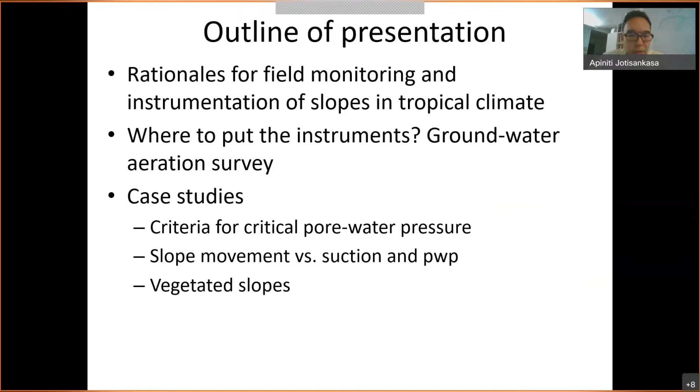First, I will speak about the rationales for field monitoring or instrumentation of slopes in tropical climate like Thailand, and I will try to answer questions like where to put the instruments. We will talk about the new technology called groundwater aeration surveys, and then I will present various case studies in Thailand, like the criteria for critical water pressure or suction, and the relation between slope movement and suction, as well as vegetated slopes. And with that, I will conclude.

So first, the problem statement. Slope erosion, soil erosion, or slope failure like this happens so frequently in highway, rural road networks in Thailand, and these are mostly related to heavy rainfall, becoming more and more frequent. This is possibly due to extreme climate leading to severe drought alternated with heavy rainfall, forest fire, and so on. There are also needs for agricultural land in highlands and mountainous areas, as well as encroachment of poor communities in many landslide risk zones. So many farmers practice slash and burn that lead to air pollution, erosion, and landslide risk. This indirectly affects landslides on the highways and roads going through this mountainous area.

So in Thailand, I think like in many places in Asia, we suffer from shallow slides or debris flow in hilly terrains like this. These shallow slides can be widespread and lead to debris flow in a large area, causing a lot of destruction. But this kind of shallow slide can be prevented successfully using vegetation and bioengineering, because in many cases a hard engineering structure approach can be too costly. There is also a need for providing an early warning system for such rainfall-induced landslides, and one requirement is a low-cost monitoring system so that we can install as many of these devices as possible in the field.

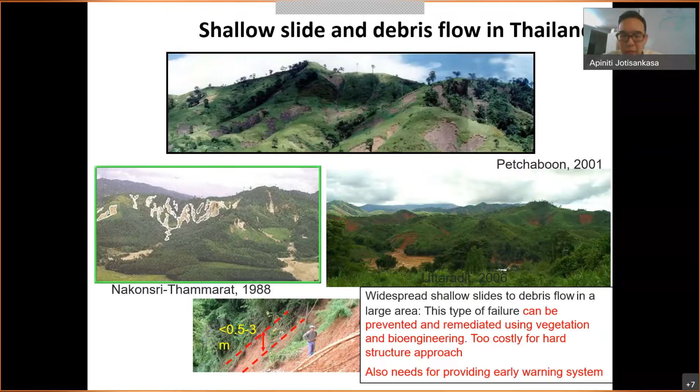One of the simplified mechanisms we commonly assume is that when the rain falls, it leads to infiltration and wetting front movement, or a rise in the perched groundwater table. With the reduction of soil suction or increase in pore pressure, this leads to a decrease in effective stress and subsequently a decrease in shear strength and slope stability. Because soils in tropical areas are normally unsaturated, understanding infiltration is very crucial, in terms of the soil water characteristic curve, permeability function, and so on.

However, in the field, seepage in slopes can be quite sophisticated. For example, we not only have rainfall infiltration, but also exfiltration of groundwater from rock layers to the topsoil, and this inclined seepage in rock layers can happen along discontinuities. On top of that, runoff and severe erosion can continuously change the slope geometry, especially at the toe. And after a long drought season, we can have desiccation and cracks that lead to preferential flow paths. So in short, for seepage in tropical slopes, the wetting fronts don't normally come uniformly but rather in terms of finger flows, for example.

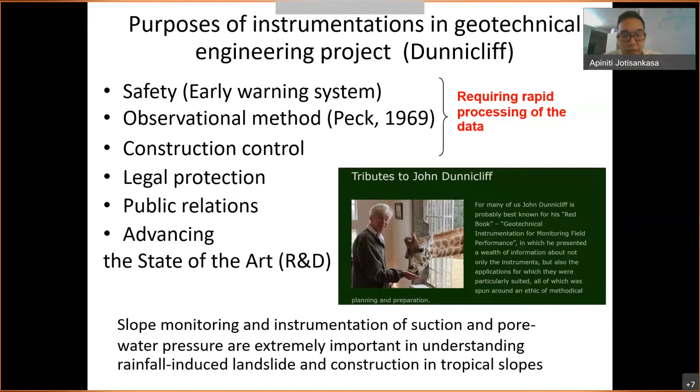I would like to introduce some of the recent advancements in the slope monitoring system that we developed at Kasetsart University. Right now we have developed what we call the GIL platform. GIL stands for Geotechnical Innovation Laboratory of Kasetsart University.

With the various kinds of slope monitoring devices that I will introduce in a bit, we transmit the data through what's called NB-IoT in Thailand. It's one of the popular low power wide area networks in Thailand. Maybe you can find your own similar network in your country.

With that, we send data to the cloud server and can do online analysis or processing of the data and provide warning criteria. This platform can be accessed using a web application or mobile application on your phone. If you calculate, for example, the factor of safety or the warning criteria based on the inclination or tilting of the slopes, it gives you a notification if any likelihood of failure is going to happen.

Now I would like to talk about the location, the effective location of the instrumentation. When we decide to do this instrumentation in the slope, we have to decide about the location of the instrument. However, in reality, the seepage can be very irregular, unlike what you get from numerical analysis.

The flow can be like finger flows, pipe-like flows, or fracture flow. So it can be very difficult to find the exact location of this critical seepage zone. However, the success of the drainage technique for stabilization or landslide warning systems pretty much depends on the location of this instrument. Of course, you can use commonly used geophysical methods like resistivity that are commonly employed in geotechnical engineering, but it still needs some expertise and processing time.

So if you just want to go onsite and then be able to locate the area where there is seepage, we adopted the technology developed by Dr...

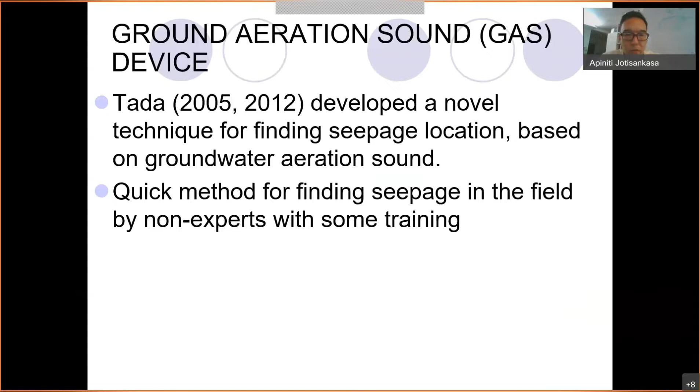Tada in Japan in 2005 developed a novel technique for finding the seepage location based on what they call the groundwater aeration sound. This is a quick and convenient method to find seepage in the field. It can even be used by non-experts with some training, and is quite suitable for practical work that requires immediate information on seepage location.

For example, if you want to determine where to put the piezometer or the horizontal drain, you should know exactly where the groundwater comes from in that part of the slope.

So this is how the device looks. The device uses an ultra-sensitive sensor, just like an accelerometer or a microphone, for picking up the groundwater aeration sounds. With large amplification, we could hear that sound and see the amplitude or loudness of the sound in numeric terms.

These sounds actually come as a result of water seeping through the soils. Once water seeps through the soils, air will be pushed out, resulting in what they call the bursting of the water menisci, and this air bubble will burst.

This sound level in terms of acceleration will be calculated and processed, shown by the device as just an index unit called the d value.

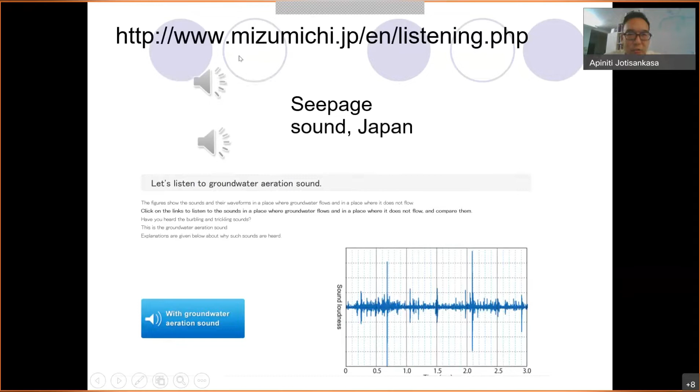Unfortunately, due to technical reasons, I was trying to play this sound but it doesn't work. But I'll give you a link here where you can log onto this website, press this button, and hear the sound for yourself later on.

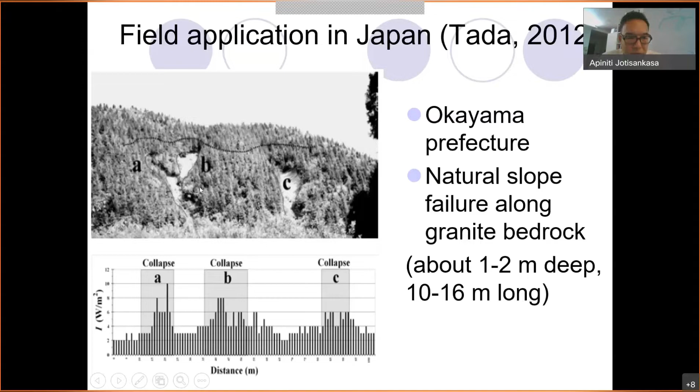For example, on a hill slope like this, where there was a landslide happening, right after the landslide there could be a scar like this. But after many years, vegetation comes up and you cannot see the scar anymore. So these studies just walk on top of the hill like this and listen to the sounds, and they could hear a very loud sound just on top of the scars.

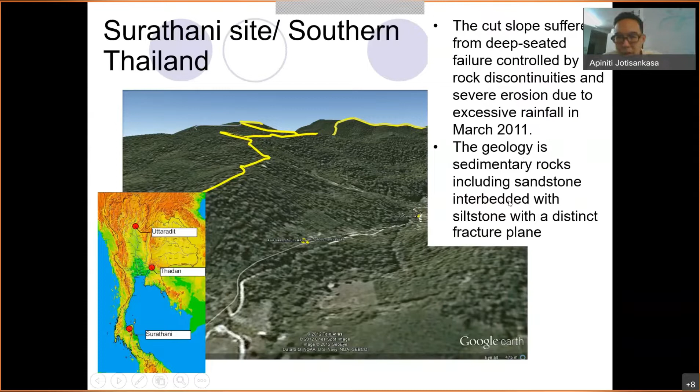Another site we experienced is on the cut slopes in Surat Thani, in the southern part of Thailand. This is a cut slope that suffered from deep-seated slope failure, controlled by some kind of rock discontinuity, and also suffering from severe erosion. The geology of this site is sedimentary rocks, including sandstone interbedded with siltstone, with some distinct fracture plane.

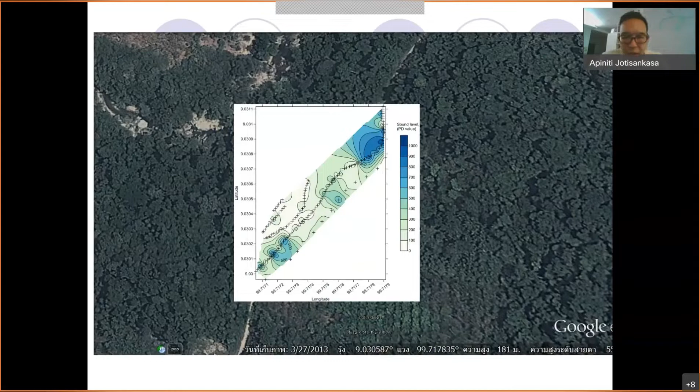We could actually see that the location of the gully coincides with the location where we could hear a lot of seepage sounds. So in practice, even without this device, it's quite intuitive to think that along the gully there will be a lot of seepage anyhow.

We also combined this with geophysics tests, and the result from the GAS survey was in good agreement with the geophysics studies.

This is quite counterintuitive when you think that at the toe or lower part of the slope, you would expect to hear a louder sound of seepage, or more critical seepage sounds.

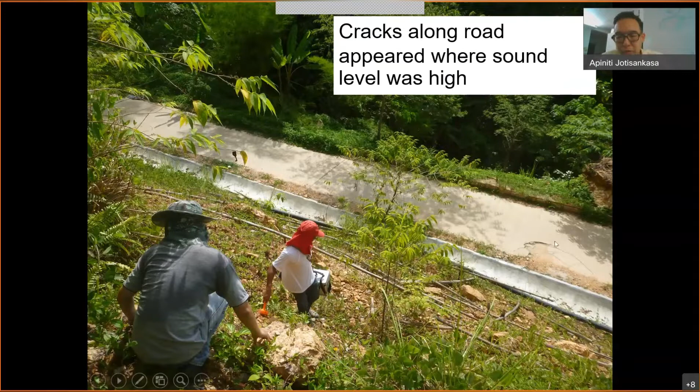One useful tip from our study is that we found the cracks along the road actually coincide with areas where the sound level is quite high. So if you want to quickly locate the area of high seepage, that's the location where the damage to the road appears, just like this.

The orientation of the cracks along the roads is actually aligned with the orientation of the rock fracture planes and with the high sound level of the seepage. For example, along this crack here, you could hear a very loud sound of the seepage.

Another attempt we tried is to correlate this water pressure with the groundwater aeration sounds. So I would like to explain this case study, where we put water pressure and suction monitoring devices on the vegetated soil fill in Nakhon Nayok.

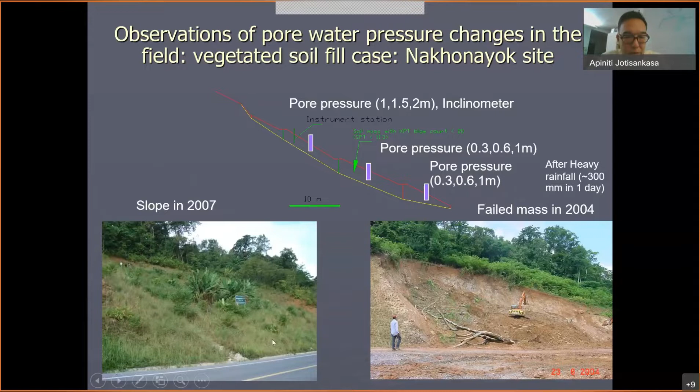And then we could actually observe the movement. This is a typical result of the water pressure and suction measurements in Thailand.

During the rainy season, the suction can be on the order of 0 to minus 25 kilopascal of pore pressure, and only during heavy rainfall intensity. These bar charts represent rain intensity; at this point it's more than 100 millimeters per day, and we start to see positive pore pressure, just like this.

So suction is important, of course, but at the critical time when the slope starts to move, it only moves when you have positive pore pressure.

During the dry season, the water pressure decreases, suggesting suction builds up, and it keeps decreasing until about 100 kilopascal, at which point the low capacity tensiometer we use doesn't function anymore. This means the tensiometer needs frequent maintenance to function properly.

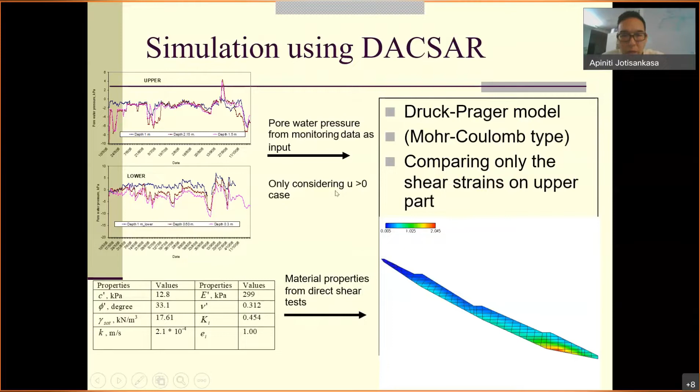We tried to back-analyze or simulate this using the finite element program called DACSAR, developed by Tokyo Institute of Technology in Japan. We used a simple Drucker-Prager model and compared the shear strain, which gave quite a good comparison.

The simulation underpredicts the shear strain, but if we change the modulus value of the soil, we can get a better improvement.

The key point here is to show that the movement of the slope starts to happen when you have positive water pressure. With the simulation, we could use the shear strain at the failure point as the threshold we develop for the inclinometer reading.

So we could have a threshold value for a warning system, based on rainfall intensity, past landslide events, or simulation using finite element software for seepage. We can get the water pressure, expressed in terms of RU or coefficient of pore pressure, and shear strain, and develop some kind of alert, alarm, and action based on this threshold.

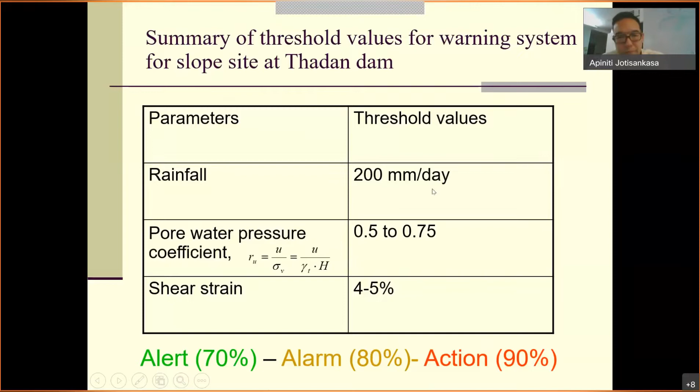Now I would like to talk a little bit about groundwater aeration again. Earlier we discussed this PD value, which represents the loudness of the ground aeration sound. We tried to correlate this PD value with the water pressure.

We could hear the groundwater aeration sound, or the PD value, when there's some suction, because the seepage can happen in the unsaturated zone, with air bubbles bursting and so on.

However, we find that this gas technique, or groundwater aeration, depends on the timing of the survey. When we go back to the site at different times, we get different correlations, due to differences in background noise and timing. However, in relative terms, we could find that, for example, this area is a more critical zone than other zones.

So we have a different set of correlations between the values and the average water pressure in the slopes. This observation is, of course, site specific and should be used with caution, but it gives us some idea that if you only have this groundwater aeration device, you can go to the site, put it on the soil surface, and guess how much seepage there would be on the slopes. So we did a SWOT analysis for this gas survey.

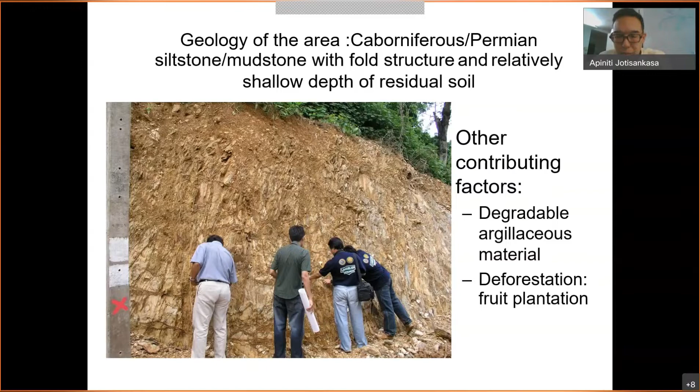The major mode of failure is shallow slip, like in the photo. The geology is Carboniferous Permian siltstone and mudstone with fold structure, and the depth of residual soil is relatively shallow. Other contributing factors include the degradation of what we call argillaceous material, and some deforestation as well.

So clearly, if the rain keeps supplying water to the slope, infiltrating the slope, we would have a perched water table at the bedrock.

And then during the dry season, we have no rain at all, and the water pressure reduces down to the point where the tensiometer starts to cavitate, at minus 80 kPa. So again, we need frequent maintenance of the tensiometers.

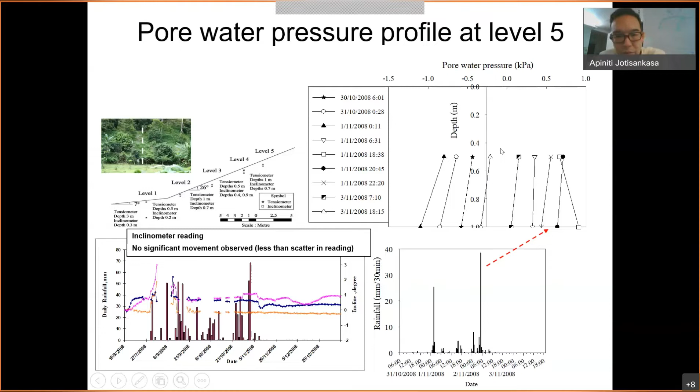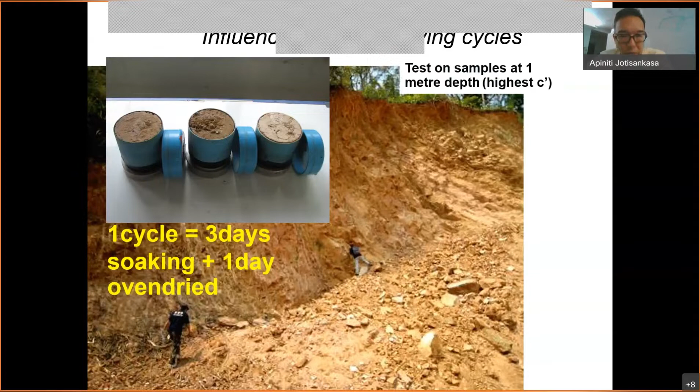So we look at the effect of drying and wetting. We simulate this in the lab, like 3 days of soaking of the sample plus 1 day of oven dry. We call this 1 cycle. So we put the sample through 5 cycles of wet and dry. We could see that the cohesion value of the soil actually decreases with the cycle time of wet and dry. But this is a small direct shear test, so we could have some cohesion intercept here. We could say that the C-dash or effective cohesion reduced by 50 to 60%, while the angle of shearing resistance phi-dash is relatively unchanged.

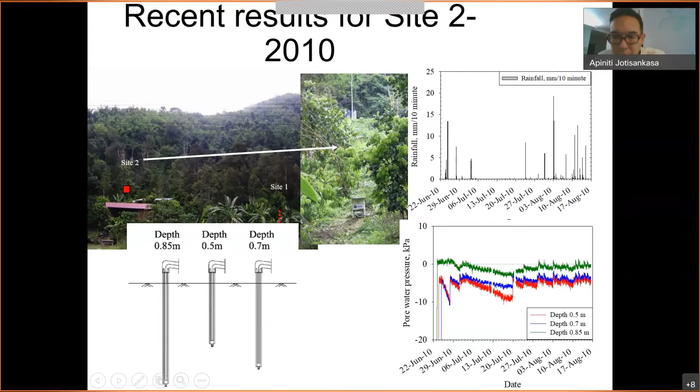Some recent event, not so recent, it's 2010 I think, we had a flash flood event here. This is the reading during normal time, so we have negative pore pressure like this, minus 10 to 0. And during the flash flood, we were lucky to be able to monitor the slopes on the side during this flash flood event. So we could obtain somewhat the soil moisture or water pressure profile on the slope during the flash flood. But it's only the flash flood, no slope failure.

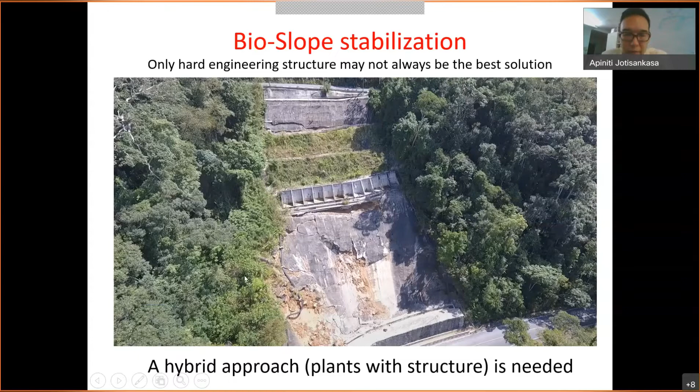So we like to use what we call soil bioengineering, which is defined by Sotir in 2002 as a sound engineering practice that integrates ecological principles to assess, design, construct, and maintain living vegetation systems, to repair and protect, and enhance healthy function of the slope. So in Thailand, we use things like vetiver grass or soil bags with live stakes and so on.

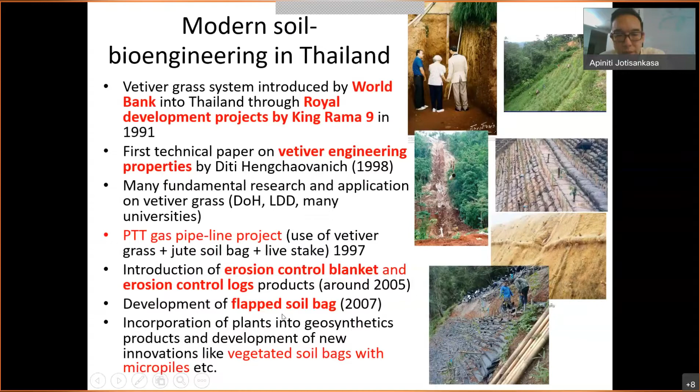So this tells you the timeline of bioengineering in Thailand. We use vetiver grass quite frequently and widely, but we also use erosion control blankets, coir logs, flap soil bags, and so on. Recently, we use these flap soil bags with micropiles.

So the research approach is that we combine field observation, laboratory work, and numerical modeling. Field observation is very important, so I would like to relate this bioengineering to the field monitoring part of my talk.

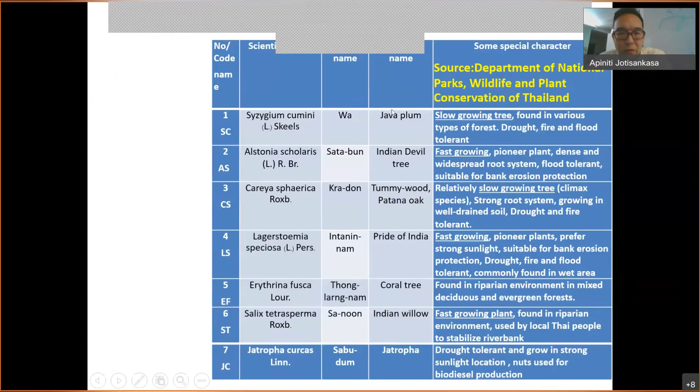Firstly, which species can we use for bioengineering? We investigate various kinds of live stakes. I won't have time to go into detail on all the species, but I want to point out that fast-growing species, or what we call pioneer plants, are very useful and effective as live stakes.

So in order to plant trees successfully, you need an irrigation or watering system. We also look at root-soil mechanics as well.

This is the biomechanics of roots with soil. When we think about the contribution of roots to the soil's shear strength, it can be in terms of root reinforcement, like the root cohesion, CR.

So we have a simplified model for root reinforcement as root cohesion. Roots can also affect the water pressure by infiltration and transpiration. Roots can affect infiltration by changing the soil water characteristic curve or permeability function of the soil, and they can affect transpiration by inducing suction in the ground, which decreases the water pressure.

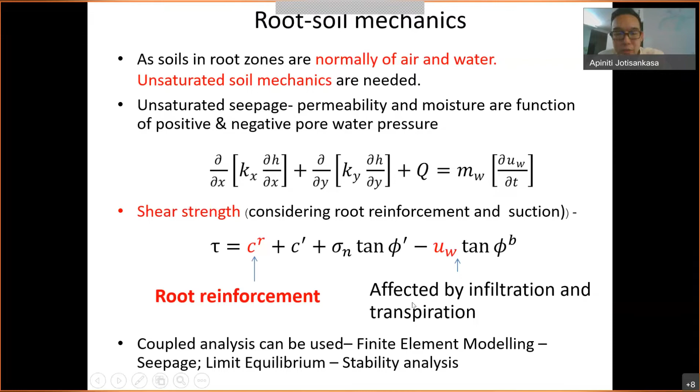When we look at a simple mechanistic model for root reinforcement, like Wu 1979, we can calculate the root cohesion based on the tensile strength of the roots and the amount of roots in the soil.

At Kasetsart, we also use the large direct shear test to test the root contribution on soil in both unsaturated and saturated conditions. We developed a model to predict root cohesion based on what we call the site root area ratio. So if you know the root area ratio at the site, we can predict the CR, or root cohesion.

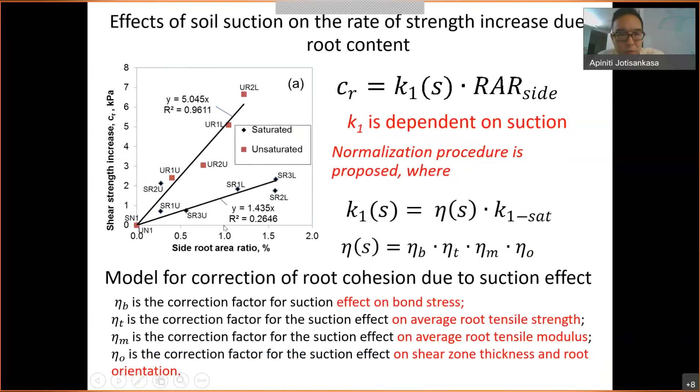We could adopt this technique in the field as well. We put what we call a mini rhizotron, which is a transparent tube, on the slopes, and then we can monitor the root area ratio in the ground. We could also monitor the suction, but it's only a point-wise measurement, at one point.

But of course, we could extrapolate this point measurement by using some image analysis of the whole slope, something like that.

In this case, we use what we call jatropha live stakes, or brush layers. The live stake is laid in an inclined direction and performed quite well, and we observe the root concentration in terms of area ratio in the ground.

With the root sketch like this, we could calculate the root area ratio, and with the relationship between root area ratio and cohesion, we could estimate the root cohesion in the field. With the root cohesion, we could estimate the factor of safety.

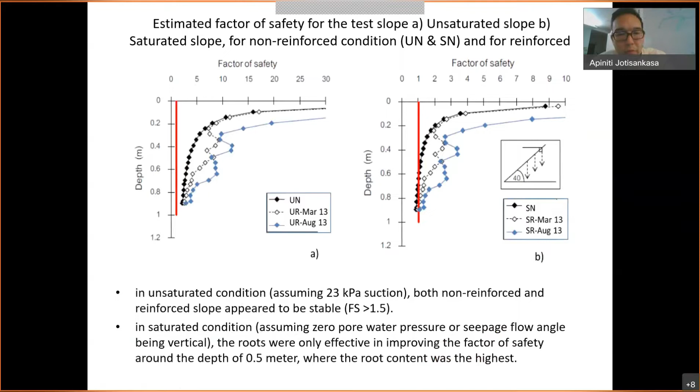But of course, the factor of safety, or the contribution of roots, depends on the suction, on the moisture condition as well. So this factor of safety related to roots is also related to the suction condition in the field. So soil suction is not only important for early warning, but it's also important for calculating the contribution of roots on slopes.

Another area where slope monitoring is quite important is when we evaluate erosion control products like slope mulching. We know the benefits of soil mulching include preventing erosion from direct raindrop impact, preventing soil surface drying, increasing soil nutrients, and so on. We have various techniques like hydroseeding, 3D netting, and erosion control products.

In Thailand, we have this test site at Doi Inthanon that suffers from shallow movement. Previously, the slope was stabilized using shotcrete, and it failed. So we use this erosion control device with horizontal drains, and we install some water pressure monitoring devices here.

Okay, this is the location, the horizontal drain. I would like to show you the soil cover system that we use for this remediation.

We have various techniques like the erosion control blanket on top of the clay sorting. So we have the fine grain on top of the coarse grain, so it could actually act as a capillary barrier on the slope as well.

Section B has soil log and clay sorting, but without the soil blanket or erosion control blanket. And in D we have soil blanket, soil log and geocell erosion control mat. We installed in total 60 KU tensiometers on this part of the slopes.

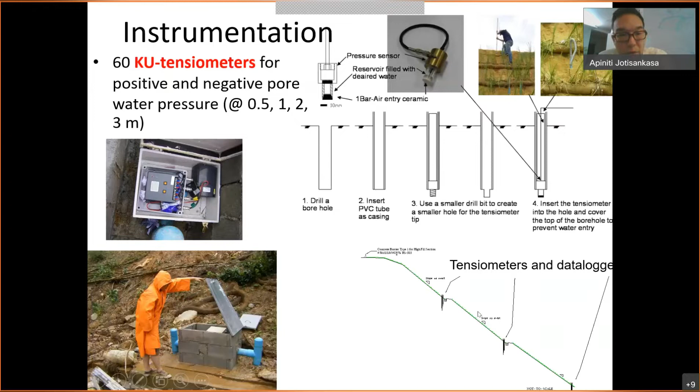The monitoring of the rainfalls shows that we have various times when the maximum daily rain is more than 100 millimeters. In Thailand, the usual threshold when we issue the warning for landslide is 100 millimeters per day, so on this day we had quite a few days when we had to issue the warning.

After this first time evaluation, we find that plot A is better than the other plots. This is just like the visual inspection.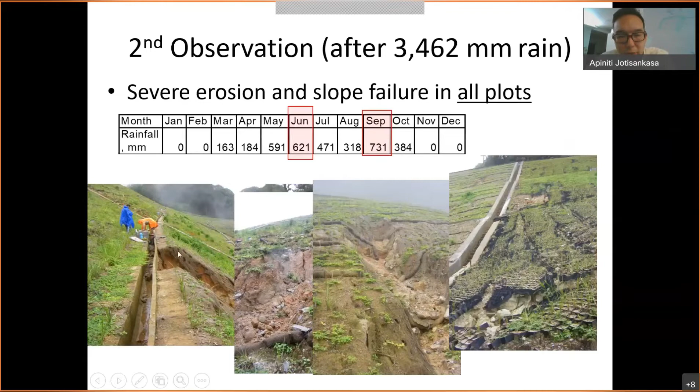However, the second observation after the torrential rain in Thailand shows that all the plots actually failed, from shallow slides and so on like this. And we monitor the pore water pressure.

We also tried to do the simulation using some two-dimensional finite element software like SEEP/W. We could get good agreement, but mainly only at the 0.5 to 2 meter depth. At the 3 meter depth, we still struggle to get good agreement with the simulation, and we think this may be due to the 2D effect as well.

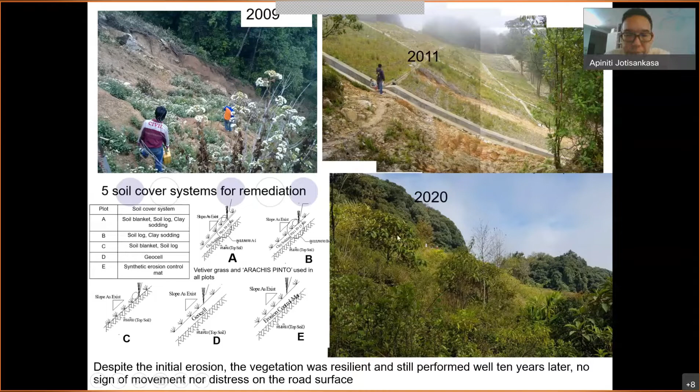This is the first time we use this technique in Thailand, so we were concerned about the performance of this particular technique here.

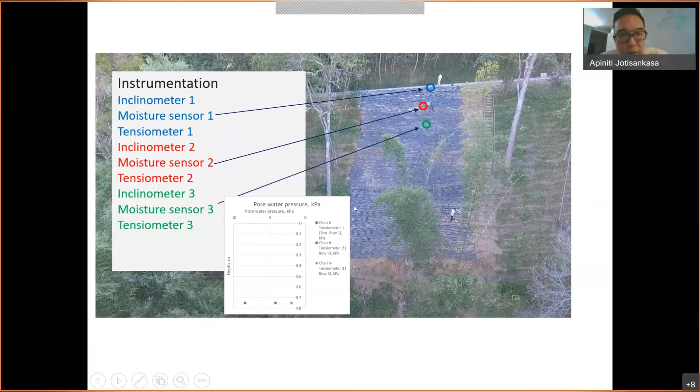Now let's see the monitoring results. The tilting degree, this is the tilting of the screw piles, is very small, even less than 0.1 degree. And the soil moisture is actually lower in the lower part.

If we look at the water pressure, we have a negative water pressure during the dry period, and during the rainy seasons it starts to go up like this, and again the water pressure is in the magnitude of about -10 to 0.

One of the points I would like to make is that with the tensiometers, it's very good to have the measurements, but in a remote area like this, it's very difficult to go back to the site and do the flushing or maintenance of all this.

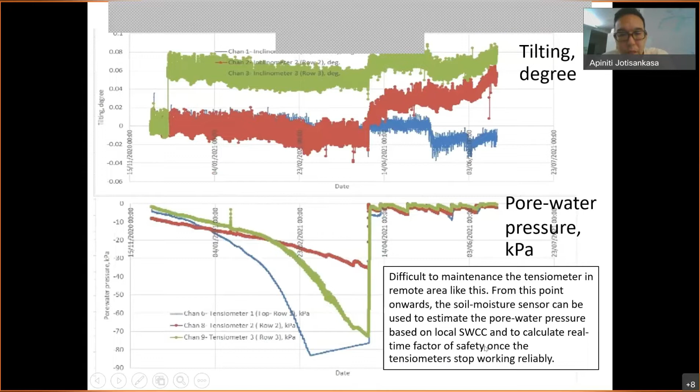Measurement to calculate a real-time factor of safety. So with this, I would like to conclude that slope failure and erosion is more severe due to climate change and increasing infrastructure in Thailand. And water seepage in slopes is so sophisticated in the vadose zone, not just because of suction and the unsaturated soil property, but due to geological heterogeneity, rock fracture, and so on.

The critical job is how to find the suitable location to install these instruments. We find that major slope movement normally takes place when water pressure is positive. But of course, monitoring of soil suction and water content is quite useful, also useful for early warning of slopes. And not just that, it's also useful for bioslope stabilization if you want to have controlled irrigation in order to make your plants survive and be able to stabilize your slopes.

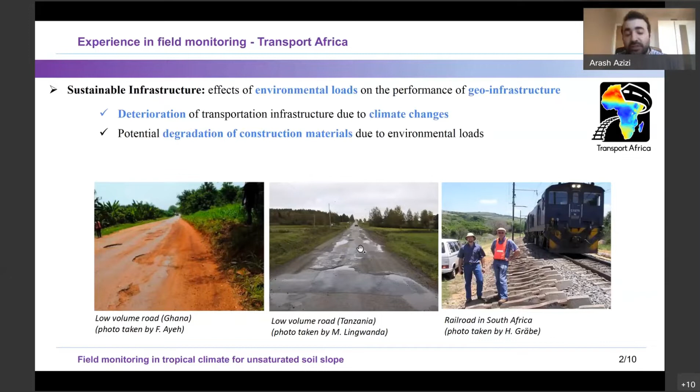The first thing is, of course, making a sensor network to measure soil-atmosphere variables. Atmosphere means climate, the meteorological variables. So we use rain gauges and temperature/relative humidity sensors to measure these variables - rain gauges for rainfall measurements. There are other meteorological sensor types for atmospheric pressure or radiation, but we used only these two sensors in our project.

But the other side is, of course, measuring soil variables. We used different types of sensors to measure soil variables. We could measure displacement, we could measure deformation with different sensors, but because the roads we were working on were basically rural roads with low traffic loads, the focus was the effect of changing hydraulic properties. So we didn't measure any deformation, we only measured the changes in water content and suction.

So I'm going to introduce briefly how these sensors work. One variable in the soil, as we've been talking about, is water content - volumetric water content, saturation degree, any sort of water-related parameter. We use a sensor called the 5TE, developed by Meter Group, which is a dielectric constant sensor. It measures the dielectric constant of the soil, which is basically the ability of the soil to store electric charge. Fortunately, there is a good relationship between this dielectric constant and volumetric water content, so it can measure volumetric water content indirectly and quickly measure the variations of volumetric water content.

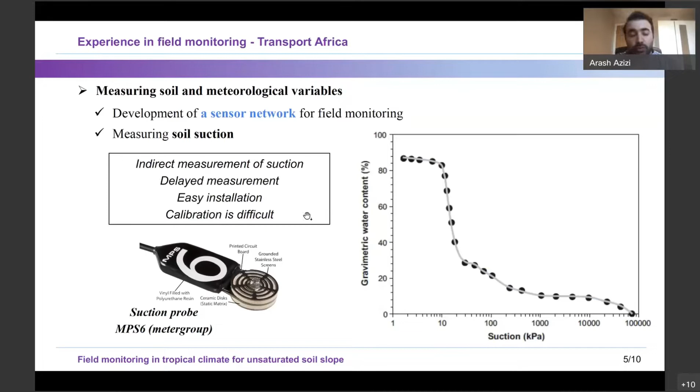Installation is easy. You can bury it in the ground and leave it forever. The measurement is just a bit delayed sometimes because equilibrium takes time, and the calibration is difficult, so you have to trust this curve given by the manufacturer.

The last sensor I'm going to introduce is the high capacity tensiometer. You've heard about it yesterday and today. This is very probably the tensiometer we can trust most, because it measures negative pore water pressure directly - it's a direct tension measurement of the water.

We have a water reservoir behind or inside the sensor in the high capacity tensiometer that goes under tension when the sensor is in contact with soil. So it measures negative pore water pressure of the soil, which is basically suction.

Installation and working with the tensiometer in the lab is quite easy, it's simple, we can fit it in any equipment. I think Ashutosh showed you how we fit it on oedometer samples yesterday.

In the field, its application is challenging - we have to install it in a way we can remove it when needed, for example when it cavitates. So there is a limitation on the range of suction measurement. I think Professor Singh showed you this in earlier days.

It was around 80 to 90 kPa suction. Then advanced high capacity tensiometers, like the one developed at Durham, could measure down to minus 1.5 megapascal negative pore water pressure, basically suction up to around 2 megapascal. Recently we developed another high capacity tensiometer that can measure up to about 3.5 megapascal of suction. But if we exceed these limits, we have to remove the tensiometer from the site, bring it to the lab, resaturate it, and then put it back in the ground at the site again.

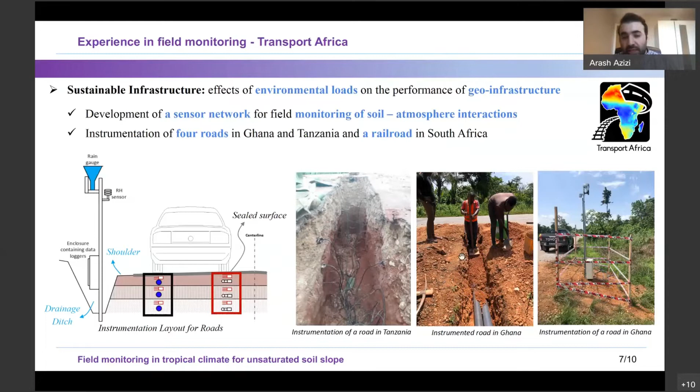Basically, we collect the data there. For tensiometer, as I said, we have to be able to remove it. So we developed these pipes at Durham, and we decided to only measure suction at the shoulder, at the outer wheel line of the road. We installed these pipes from the shoulder, pushed them into the roadside, and tried to get to the same depths and positions of the other sensors. So these are basically the pipes and tensiometers that we used to measure suction in this road.

This tensiometer basically goes inside the pipe. So if during the measurement we see that it cavitates and it needs to be taken out, we can remove it from the pipe, and after resaturation, we can bring it back and push it into the pipe again to get to the same position.

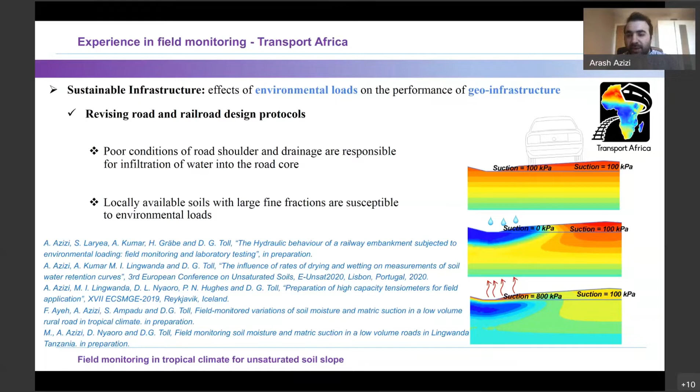Thanks a lot for giving me the time to talk today as well as yesterday. And I think I can pass it over to Faris now to explain their experience in Malaysia.

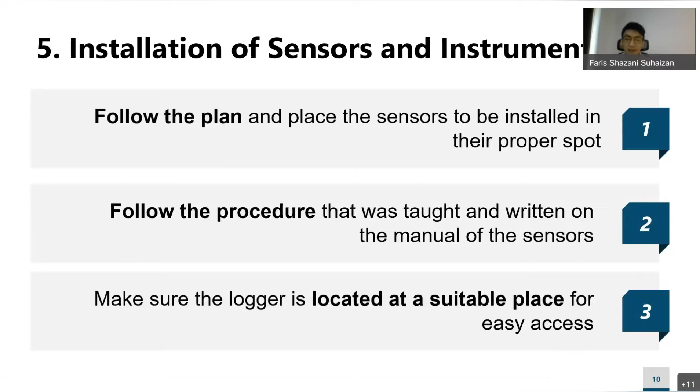Step 6 is monitor the recordings. Check the readings if it's reasonable, and if you find any anomalies, rectify it as soon as possible. This is to ensure the data collection goes smoothly and accurately throughout the duration of the project.

Lastly, step 7, evaluate the data. When you're monitoring the data, after you obtain it, you need to evaluate it. Making a graph is a good way to check the progress of the data. When there's some abnormalities or ups and downs on the graph, you have to make the reasoning to why some of the data are not showing appropriately or different than expected.

In field monitoring, you need a system to do the monitoring. This system is called the data acquisition system. It's a basic system that consists of sensors, measurement hardware, and also a computer with programmable software. The objective of a data acquisition system is to record measurement in readable form.

So you need components to make up a system. For the data system, there is a list of instrumentation needed: number 1 is the data logger, which is to collect the data. Number 2 is the sensors, which convert the environment into binary data. And number 3 is the power supply, which is to power the data logger and sensors. These 3 are the main components.

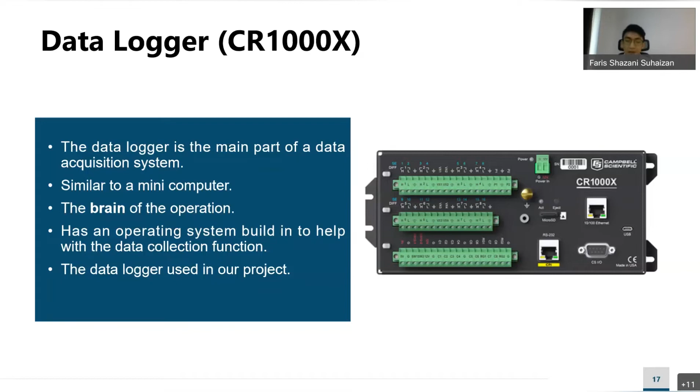Data loggers allow users to capture various types of information about a specific environment or process, often gathered remotely over an extended period of time. The data logger also has an operating system built in to help with the data collection function. The data logger used in our project is the CR1000X by Campbell Scientific.

So this is the component of the data logger. We can break it into 5 main components: the power supply, the input terminal, the power terminal for sensors, the earthing terminal for sensors, and also the output terminal, where we get the data.

So the power supply is connected to the battery or a main power supply. This is used to power up the logger. And then this is the input terminal for the sensors, so the sensors will send the digital signal to one of these channels or terminals, and the data logger will record it. And then the power terminal for the sensors - there's 5 volt and also 12 volt for it. This is to power up the sensors.

And then there's the earthing system for the sensors, because you need to make an earthing terminal also for the sensors. And lastly, the output terminal, which is where we obtain the data. It can be to a USB storage card, or like we use, a terminal model that will send to the cloud system.

So how do you use the data logger? First, you connect the data logger to a computer and set the time, date, and type of recordings that you want to obtain by the data logger.

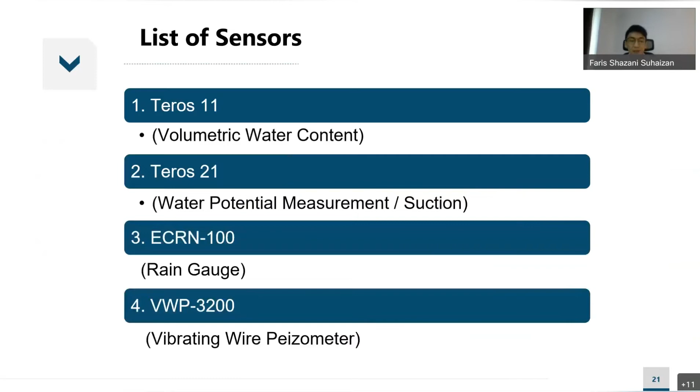So the TEROS 11, this is the upgraded version that we currently use in comparison to what Dr. Arash used in the Africa project. It is used to determine the VWC using capacitance or frequency domain technology. It uses a 70 megahertz frequency, which minimizes the textural and salinity effect, making the TEROS 11 accurate in most mineral soil. It also has a thermistor in the center needle to measure the temperature.

This sensor can be positioned in any direction. In a vertical position, it is less restricted to water flow, and it integrates the soil depth much more easily. But in a horizontal position, it will provide measurement at a more discrete depth.

Next is the water potential sensor, the TEROS 21. This is also the upgraded version of the one used just now by Dr. Arash. It's a matric potential sensor designed for long-term continuous field measurement, and it has a ceramic disc for the sensor.

It measures the dielectric permittivity of a solid matrix to determine the water content of that matrix, where the solid matrix refers to soil. The relationship between water content and matric potential, known as the soil moisture characteristic curve, is used to calculate the soil matric potential. This measurement approach, along with the calibration process used in production, allows for accurate water potential measurement.

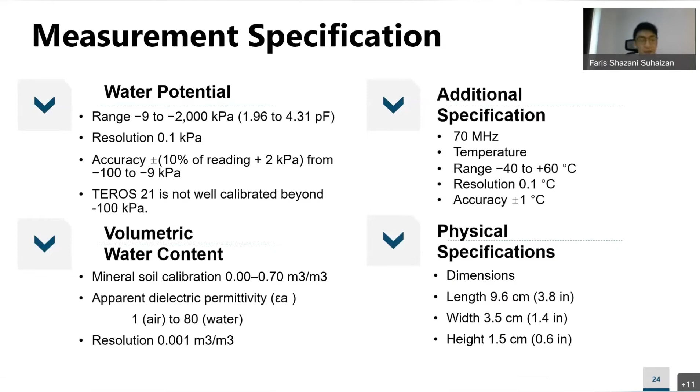So you need to rectify it as soon as possible. For the TEROS 11 and TEROS 21, they can be integrated using the SDI-12 protocol. The TEROS 11/21 sensors require an excitation voltage of 3.6 to 15, and they also require a unique address, because the factory default SDI-12 address is 0.

If you want to add more than one SDI-12 sensor, maybe 2, 3, 4, even 12, for ours we inserted about 24 sensors into a single logger. So we needed to create 24 unique addresses, one for each of the sensors.

At the end of the sensors, there are three main wires: brown is the power, the ground, and the digital communication, which is the input or the data. You need to insert it properly into the terminal accordingly.

So how do we install this? This is our site, we have two sites - I'll explain a bit about that later. The installation first involves digging a hole, making sure to avoid interfering with or hitting hard objects like rocks, pipes, etc. Also use an auger or trench a hole to the desired sensor depth.

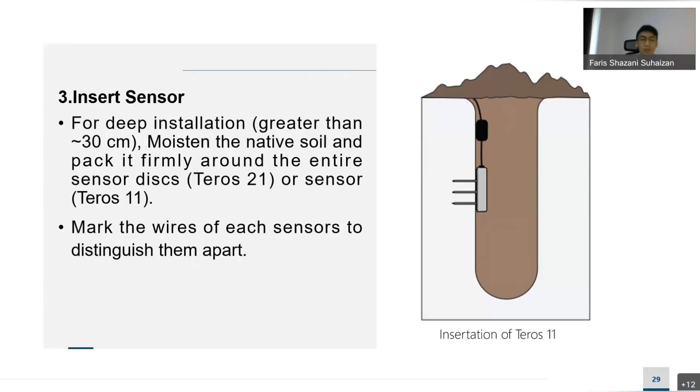Before you lower it into the trench or hole, make sure you mark each of the sensors to distinguish them apart, because after burying it, it will be a hassle to dig it out to check if you marked it wrongly, or when you connect it to the logger it shows very weird readings. So always make sure to mark the wires of each sensor.

For step 4, you connect the sensors to the logger. Plug in and check the logger to make sure the sensor is reading properly, and verify the reading is in the expected range, because when you dig the hole and bury it, the soil is expected to be disturbed.

You can test it by pouring some water, because the soil won't be very consolidated, so the water will flow much more easily at that time, allowing you to get some measurement. You may have to be there for 15 minutes to 1 hour to check if the reading is appropriate.

After everything is done, you backfill the hole and tidy the wires. You need to try to pack the soil to its natural bulk density if possible, and also tidy the wires to avoid any accidents.

So the next instrumentation is the rain gauge. What is the rain gauge? Rain gauge is an instrument used to gather and measure the amount of liquid over a predefined area over a period of time. The amount of precipitation that occurs over a unit area, usually in millimeters, is the measurement we are finding. A rain gauge needs to be placed in an open field or open area without any obstruction between the funnel, which is the entrance, and the sky where the rainfall occurs.

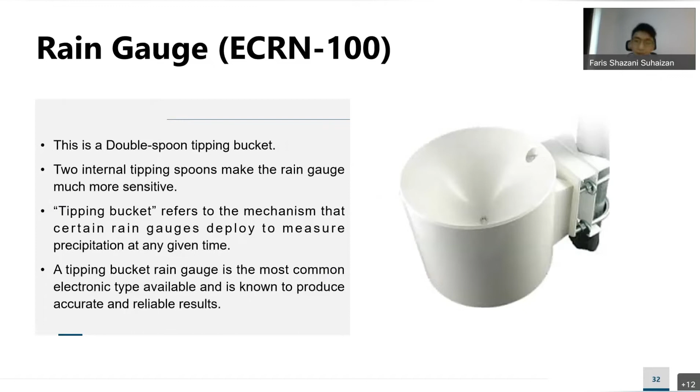So how do we install the rain gauge? First, we mount the rain gauge on the mounting bolt at the desired height. Secure the rain gauge to the pole, ensure that it's level. There's always a bubble, as you can see here, so make sure the bubble is correctly level. Then plug the sensor into the data logger and use the data logger to apply the appropriate settings to the sensor, and then gather and secure the cables to the mounting pole. For the ECRN, the resolution is 1 tip per collection, and 1 tip is about 0.2 millimeters.

The next instrumentation is the piezometer. The piezometer is used to measure the pore water pressure in the soil, earth, rock field foundation, and it can also check concrete structures. The pore water pressure is used to detect the level and flow pattern of groundwater. We use the vibrating wire piezometer. It finds its application in the measurement of positive and negative pore pressure in the soil.

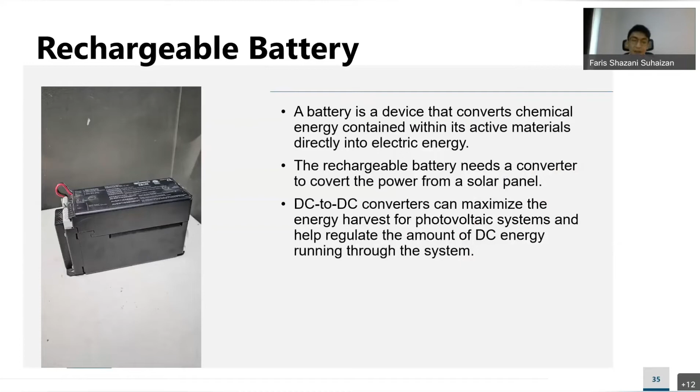Okay, there are all the sensors. Now we go to the rechargeable battery. What is a battery? Battery is a device that converts chemical energy contained within its active material, which is directly converted into electric energy. A rechargeable battery needs a converter to convert the power from a solar panel, and you use a DC to DC converter to maximize the energy harvest from the solar panel or the photovoltaic system, and to help regulate the amount of DC energy running to the system.

Cellular is a term widely used for 2G, 3G, and 4G network. This device can be mounted on a wall or on the pole.

A public static IP address can be used, but it is much better if we use a private dynamic IP address to ensure it is much more secure and less vulnerable to unsolicited traffic, so other people cannot disturb the traffic flow of the data.

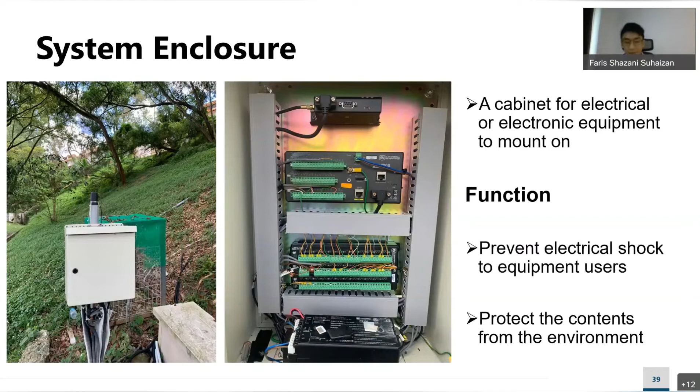So this is the first site, which is the Bukit Mewah. It's an open hill with 3 berms and residential area both at the top and the bottom of the slope. There are no big trees in the vicinity, but there's some vegetation around.

So it's quite high. We obtained the site around 25th of February 2020. It was very clear and everything.

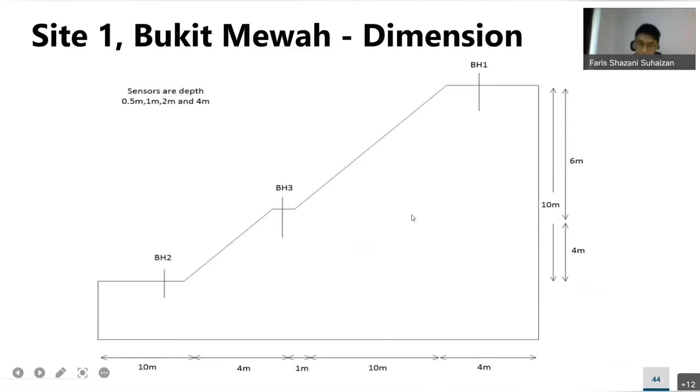Access, because the sensor wire is not long enough, we need to put the enclosure in the middle, so it can be accessed by both the lower sensors and the top sensors. If not, we need to buy 2 loggers.

So this is the 3rd of March, when we started to install the instrumentation. We start with the auger, we dig the hole, and we pack the soil. We also did a borehole to get the SI, to check the soil characteristics.

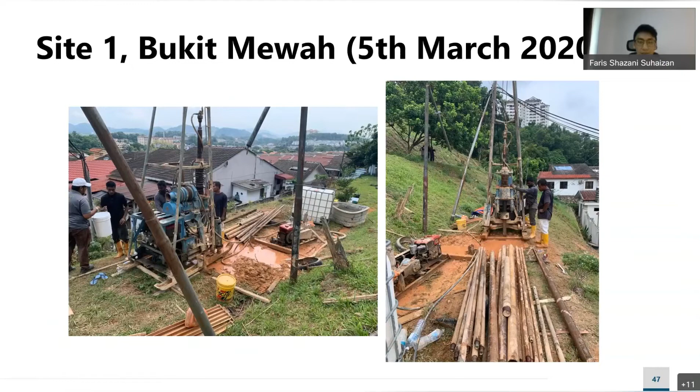This is the second site, which is a partially shaded hill with 2 berms. It's also the same, there's residential area both at the top and the bottom of the slope, but this site has a lot of big trees with canopies. So it's a bit different than the first site.

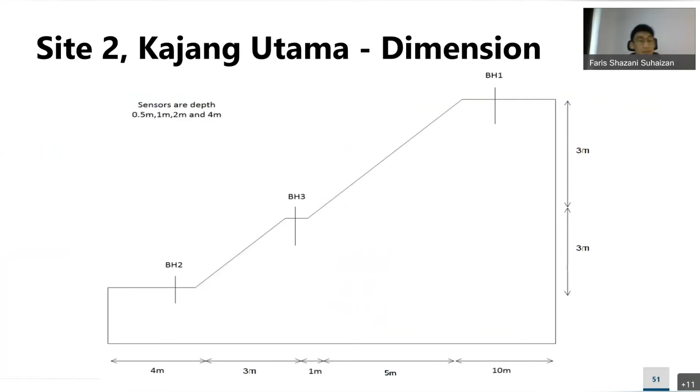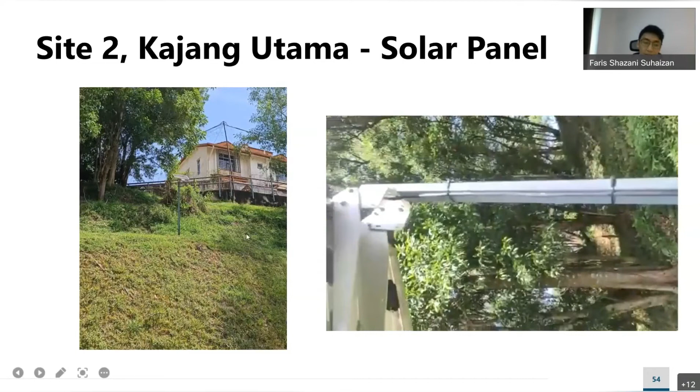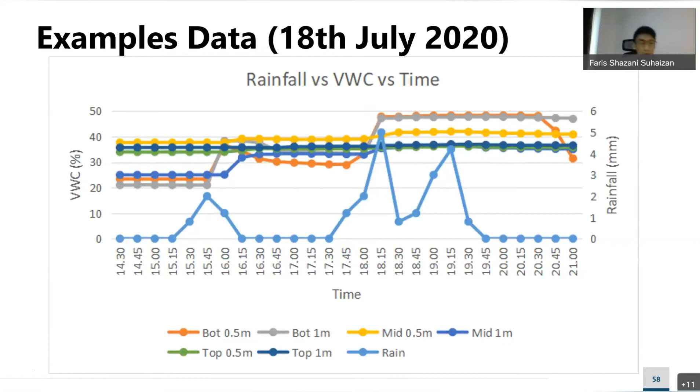You can also use it for the suction. For the suction, when there's rainfall, the suction goes nearer to 0. Yes, and then during the drying period, it's slowly going up.

So I want to share some of the issues and problems that occur during the site field monitoring. I separate it into major problems and minor problems. The major problems are COVID-19, rapid growth of vegetation, lightning strike, and infestation of termites. The minor problems are low power in battery and vandalism.

So let's start. We acquired the site during February 2020, at the start of COVID. In Malaysia, we received the first movement control order, the quarantine order, in March, and that's why we only had about 5 days of installation.

The COVID-19 also delayed the data system implementation, delayed the testing for the soil extracted from SI, delayed the data gathering, made it difficult to access the site, and also made it difficult to meet and discuss the issues of the field monitoring.

About the COVID-19, when we extracted the data, we extracted undisturbed samples, but due to COVID, most of the technicians and lab assistants were unable to go to the site or to the lab. So we had to store the undisturbed samples properly for about 3 months until they were able to use the lab again.

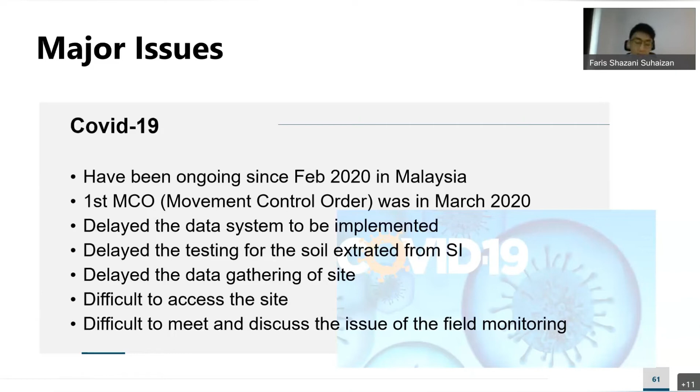So when we arrived back, it was quite difficult to check due to the COVID limitations. We were unable to move around as much.

And the next issue is the rapid growth of vegetation. It made it very hard to access the site. The readings from the sensor were disturbed, and the readings from the rain gauge were disturbed.

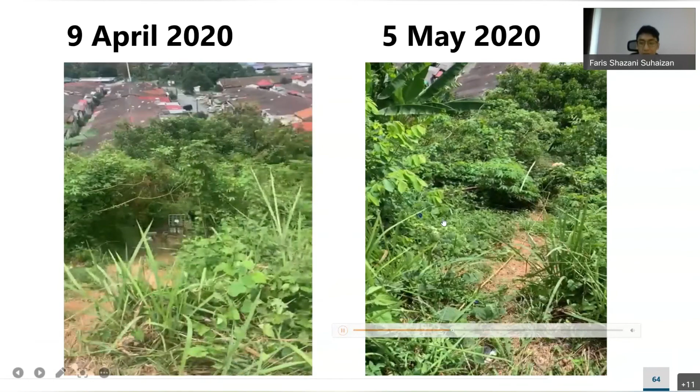Yes, the vegetation grew very fast at the site. This is on the 5th of May, we still needed to do some clearing. We've been constantly clearing, but there was still a lot of vegetation and it's still quite thick. In comparison to when we just obtained the site, within a month, it grew very, very fast.

So how do we maintain it? At first we used salt and dish soap to clear it, but it didn't work. We used vinegar, it also didn't work. We used weed killer, it worked for a while, but after that the vegetation is too strong and it just grows back. So our maintenance now is just every time before we go, a day before, we clear the site.

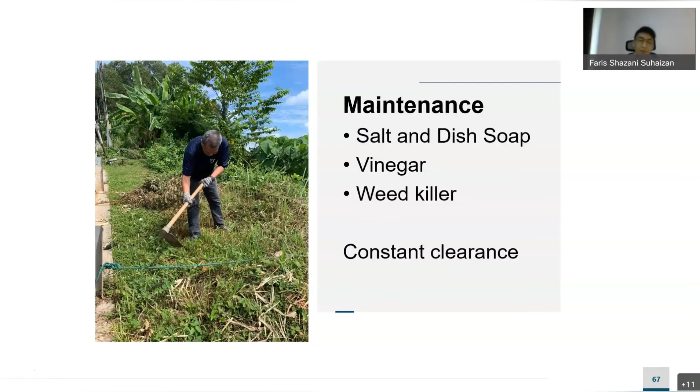I didn't save the burnt part of it, and it was very difficult. It was a very difficult procedure because we weren't sure what happened. We just noticed that suddenly there was a thunderstorm, and the next day everything went out.

So as a prevention, we installed a lightning surge protection system. How it works is it intercepts and redirects the lightning surge into the earth. This is also called earthing or grounding. The lightning protection system includes lightning rods, conductors, and ground electrodes.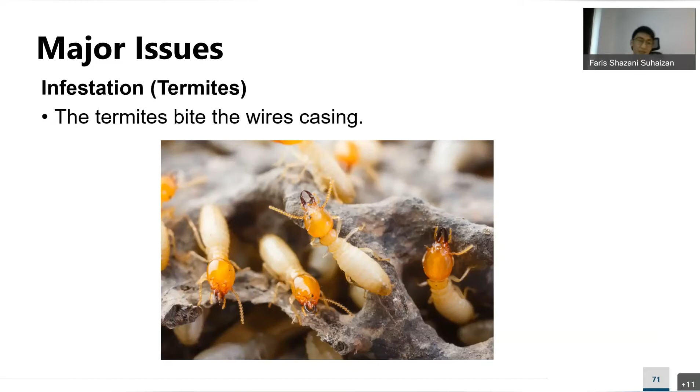Another major issue is termites. The termites bite the wire's casing. They don't bite the wire, but they bite the wire casing. But when they were biting the wire casing, they also bite the wires. So when the wire is exposed, it slowly rusts and slowly becomes unable to be used.

This is some example of the sensors that were bitten by the termites. There were multiple sensors, and we needed to buy more to change the sensors. It was quite a hassle because we needed to dig it up and remove the termites.

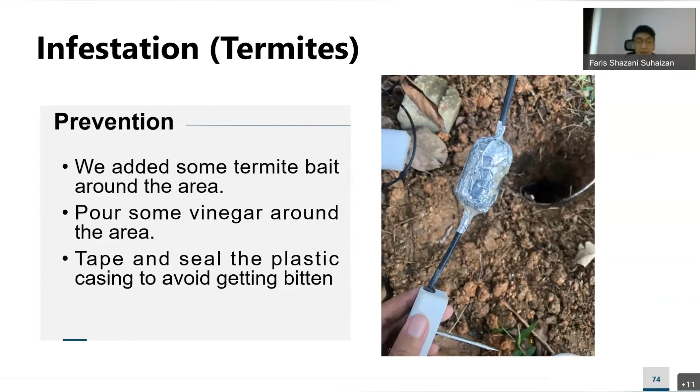So one of the ways that we did was we put some termite bait around the area and poured some vinegar also around the area. For physical protection, we tape and seal the plastic casing to avoid it being bitten. At the moment it has not failed yet, but hopefully it will maintain that way.

So for the minor issue, there's prolonged cloudy days. As you know, we use solar panels to generate electricity. So when the solar panel cannot receive sunlight, the battery is unable to recharge and the power slowly dwindles down. This affects the reading, as the battery slowly dwindles down it is not able to power up the logger and also the sensors. So slowly the reading of the sensors will go haywire and also show inaccurate results.

So one way to mitigate this is having a spare battery to recharge when the battery goes down a certain threshold of voltage.

Another thing is vandalism. There were slight cases of vandalism, like people throwing drinking glasses, and also some of them tried even to dig out our sensors. There was sign of it, but they were unable to reach far because 0.5 meters was the shallowest depth. So I think they gave up halfway.

Also, how we mitigate it is we install locks and cages for the enclosure, and also we bury most of the wire to avoid them from finding the location of our sensors.

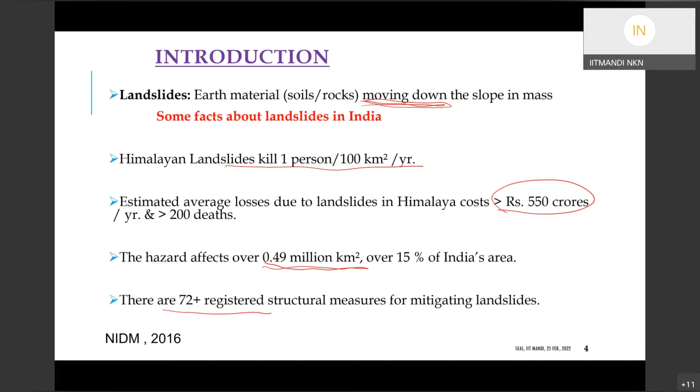It claimed 46 lives because this happened in the midst of the night, whereas in the mornings people are much more alert and can see soil movements happening on the slopes, and the disaster could have been averted. However, this happened in the middle of the night at almost 2 a.m.

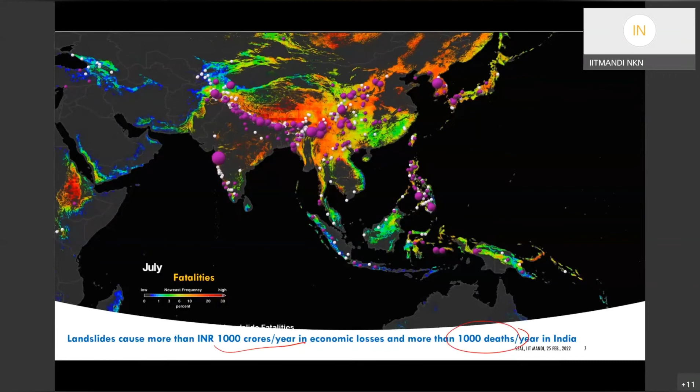When we started looking into monitoring, we have various approaches starting from structural measures, which we discussed - 72 types of structural measures already exist, and that doesn't make a major point of this presentation. So I want to talk about non-structural measures or options which we look into these areas, and when we look into non-structural measures, we are mostly talking about monitoring and early warning.

Thanks to Abhiniti and Farhan as well as Faris for giving us a very good idea on how this monitoring is taken care of and how we release early warnings based on various thresholds for different conditions, which have been shown from the morning presentations.

I'm going to continue on the same line, where most of the topics discussed were on the field scale monitoring. I am trying to get onto the particular scale where I'll be talking about local scale monitoring, then zonal, and lastly regional - or we'll start probably from regional and move towards site-specific monitoring by the end of the presentation. And when I'm talking about these scales, don't take it typically like a geologist or the remote sensing people who talk about 1:50,000, 1:5,000, 1:7,000, or 1:10,000 scales.

For me, in simple words, there are many specific points or very site-specific points within a particular locality which comes into a local scale. Many of such locals make a zonal scale, and many of such zones combine to become a regional scale. So it depends on what type of data you are having, and accordingly we'll be able to cut the requirements into which scale we need to measure or look into for monitoring.

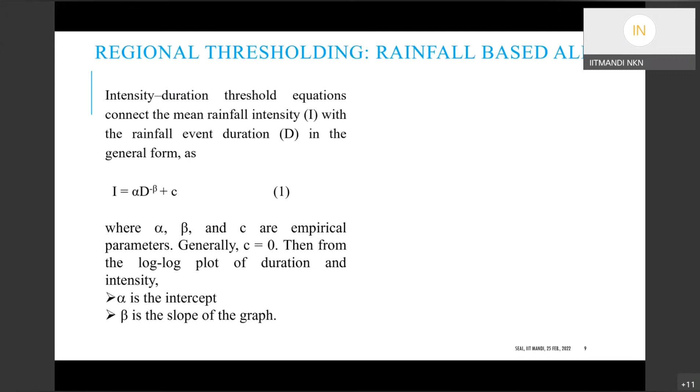So for this, we have been looking into literature, and there has been a lot of data published. Especially, I'm focusing only on the Indian Himalayan terrain, where there are a huge number of intensity duration graphs given, which give an idea about the thresholding needed for a given landslide - when can we expect a particular landslide.

There were questions from the audience in the last few sessions, answered by David Toll, about when the duration and intensities are small, and if you're expecting landslides, that is absolutely possible because probably the rainfall duration has been longer. So it's both intensity and duration which play a major role. When the duration is high, even a lower intensity can easily create a condition of slope failure.

From a different projection altogether, I could see that the landslide intensities have increased in this particular area, and we need to cut it down. So we have started working on it, and now we have developed our own intensity duration chart with which we will be able to look into the options of thresholding or giving an alert to the whole district.

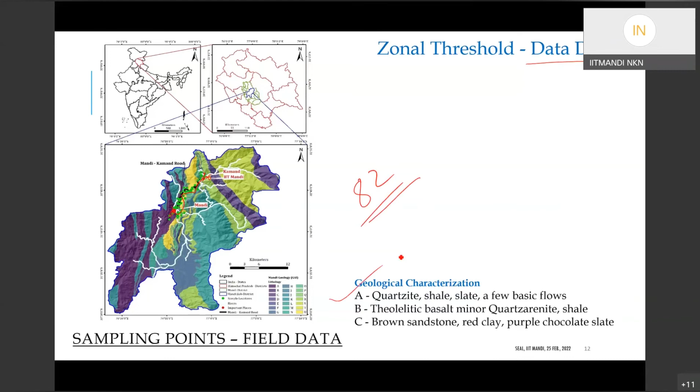We got different samples, both undisturbed and disturbed, depending on the terrain and available conditions. We characterized all these soils first based on geological characterization, then on geotechnical properties. We were just starting and had no idea how to move ahead, so we simply performed all possible geotechnical characterization tests to understand the type of soil we encounter in day-to-day travel from the district center to the campus.

So we collected all the information. Apart from this, we also had data from field investigations, including moisture content, elevation, and field slope, which happen to be major contributing factors.

By the end of this analysis, we had 22 parameters from each location, across 82 samples or locations from which we collected soil. After the analysis, we understood that out of these 82 locations, 58 were landslide locations, and 24 were locations with no landslide.

When we went for simple statistical analysis, we were unable to find any working model, so we quickly moved to machine learning algorithms to reduce computational effort. Machine learning gives a very good idea for specific problems related to slope stability analysis, which we also understood from the literature.

So we quickly formulated a model with two important goals: one is the feature selection method, by which we identify contributing factors, and based on those, go for zonal level thresholding, saying if the angle of friction in a particular area is less than a threshold, or permeability is more than a threshold, that area is more prone to landslide.

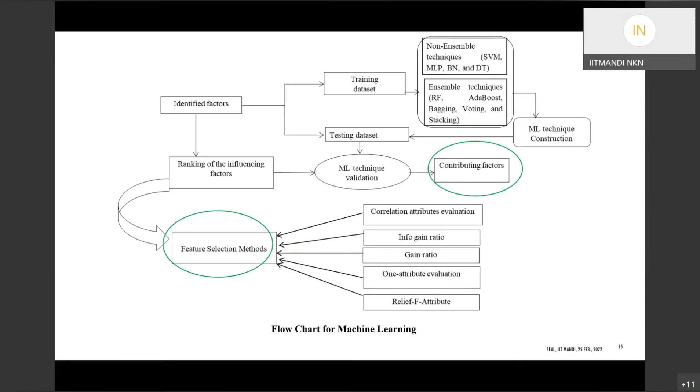So we worked on what is called AUROC, the area under receiver operating curves, which gives us the accuracy of the models. We worked on different machine learning models to rank, at a particular correlation coefficient, which parameter contributes more to the landslides or slope instability happening in this location. The list has all 22 parameters.

By the end of this exercise, we also looked into various combinations of these parameters to find the best option for identifying landslide susceptibility in this location. A combination of 6 parameters came out best: relative compaction, slope angle, porosity, moisture content, saturated permeability, and internal friction angle, giving us the best combination to zonate or identify zones probably subjected to failures.

Based on this, we came to a conclusion that these parameters, the slope angle, internal friction, permeability, and compaction, are relatively constant at a particular location.

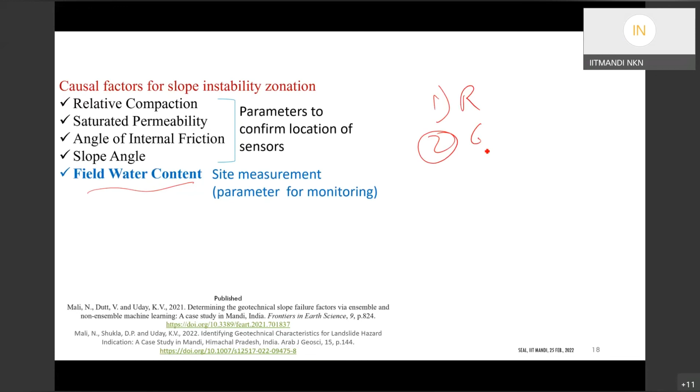To this point, as you can understand, first I had the various data of rainfall. Second, I have a very good idea about the geology in this particular area. And third, I have already characterized the parameters in the soil based on the geotechnical characterization I have done.

So now, looking at rainfall, I could get a maximum of 16 days cumulative rainfall. Whereas using geotechnical and geological data, as noted in the last slide, I'm getting an accuracy of 0.958, which is definitely not a very good working option, at least when using an option like machine learning.

So we wanted to go further, to see what combination brings the best outcome. In the meantime, we started working on various values of AEV, the air entry values, which can give us a very good idea about the unsaturated profile of this soil and whether it has any role to play.

It was also discussed that IIT Mandi is very new. We've just started our civil engineering department from 2015, so hardly 7 years from the start. We are still setting up a lot of equipment and requirements, but we'll soon be pacing up with world-class facilities and these opportunities.

In the meantime, as we discussed, we had data on rainfall, geology, and geotechnical parameters, and we started clubbing these parameters to understand how this could be done. The same machine learning, a statistical method, says 16 days is the time needed to find a consistent model to predict rainfall, again with 95.5% accuracy.

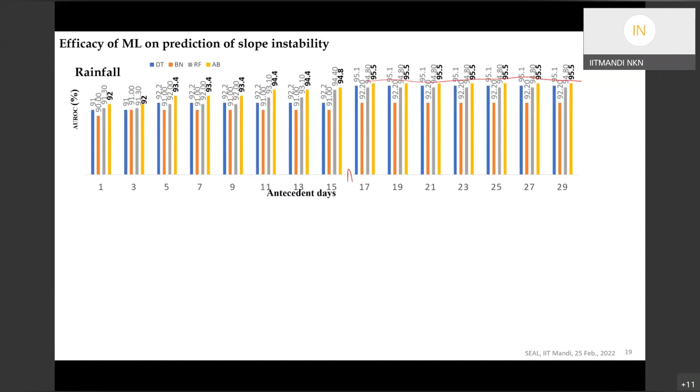When we talk about adding a morphological parameter, that is a site-specific parameter, I could reduce the time from 17 or 16 days to 13 days. At the 13th day, I could see that the model is now working well with a reasonable accuracy.

Again, a slight increase in accuracy, but I could reduce the antecedent rainfall period we require. And further, when we added the geotechnical characterization, we could see that the prediction has now gone really well.

100, of course, should not mean exactly 100%, but yes, we are able to predict based on simple training and testing of 30 and 70. We could easily understand that it improved the accuracy of prediction, and still the antecedent rainfall remains at 13 days, which we definitely need.

Further adding all 3 parameters - rainfall, morphological, and geotechnical engineering parameters - we could reduce it again by 2 more days. So we are now able to get it at the 11th day, again maintaining the same level of accuracy, very near to 100.

By this we can understand that probably using a good statistical model, especially machine learning, with the huge amount of data we have, we are able to go into a line where we can threshold, or predict which place or location will have the landslide happening.

Now we are in the case of validation, so probably after this year, we should be able to submit this paper to a journal, which is freshly cooked for now. Now I'm getting back into the monitoring system, which will be the last part of my presentation.

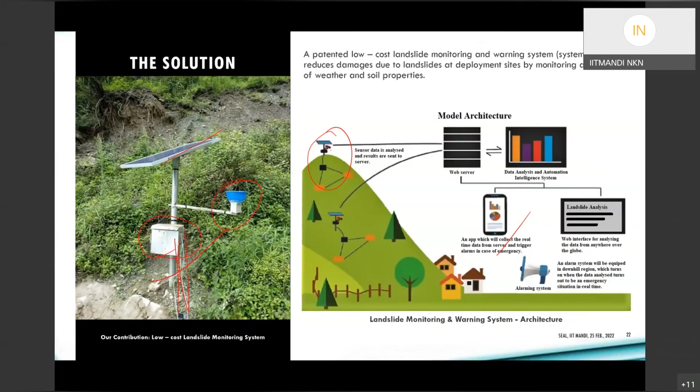So initially when we started, we never wanted deep drilling - one reason is the financial crunch, and the second, the field aspects, where in this particular soil it becomes very difficult for drilling and going deep into the systems. So we wanted to develop a system which is mostly surface based.

So we have taken up sensors which include the MPU6050, a typical accelerometer sensor, which we have in our smartphones, and we use the same type for checking tilting accuracies in various applications. So we have taken up the same sensor.

Apart from this, the rain gauge has been well explained by Faris just before the presentation - the same tipping bucket, where whenever the water fills it tips down, and the next tip comes into picture whenever that is filled. We count the number of tips, and we are able to see how much ml of water has run through this particular line, and thereby what is the intensity of rainfall measured for that time. All of this is digital, so all the information goes into the cloud.

Next, we have a temperature humidity sensor. We wanted to see the after-effects of rainfall, or before effects of rainfall - what is the temperature, how humidity is changing, and accordingly does it show any influence on landslides. This is one more important thing.

Apart from this, we are also putting up an ambient light sensor, because we want to understand the aspect of the landslide - whether the slope faces the sunshine or the leeward side, and how this light intensity changes with respect to time is another parameter we thought would be interesting.

Then of course the capacitive soil moisture sensor, where I'll be able to get the volumetric moisture content, and depending on site locations I can convert it into gravimetric moisture content - sometimes it's good to also go into volumetric moisture content.

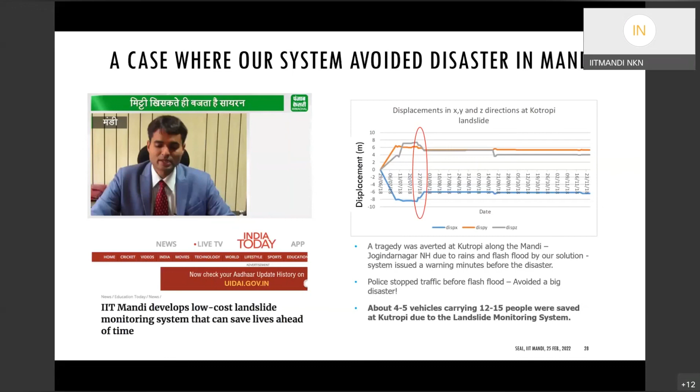Thankfully the sensors worked, and we have taken care of all the situations at the site, and averted most of the disasters. In no time it went across most publications and news articles, and finally, after all this, we got a good amount of funds.

Now the situation is slightly different. Now we are able to put a lot of monitoring stations in our particular location. Again, we are still at the level of data accumulation, data collection.

From this information, we are able to identify which areas are now prone to soil movements. Once we understand there is a typical area, I will be interested to go to that site and start working on soil suction. Give me 2 years, after which, if I'm able to present again to the same audience, I will be presenting more details on soil characterization, suction, and aspects of slope stability at that location.

For now, yes, we have started monitoring the stations using simple monitoring systems, and I'm sure, as I told you, I'll be coming back with much more on this.

Apart from this, I just wanted to conclude this presentation by giving you the last scope of machine learning. With the data we are collecting over time, we are able to look into options of predicting it using machine learning.

Per day, we are getting data every 10 minutes from almost 20 locations across the same stations. So the data handling becomes very difficult. That's why we have gone across to simplify the data processing using simple machine learning algorithms, which I can use not only for restricting or thresholding the data, but also for predictions, as well as to validate the data coming from each monitoring station.

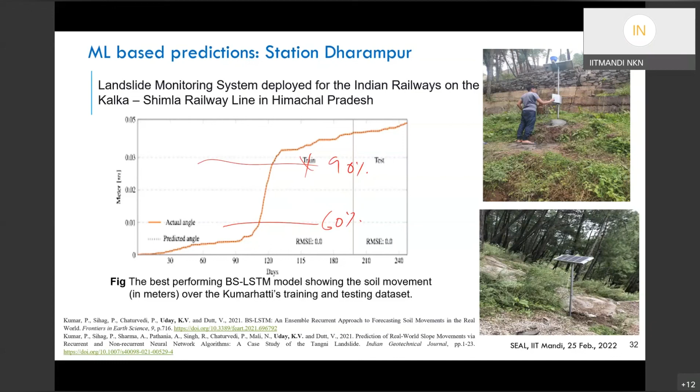So we are currently working in this particular area, and when we talk about these aspects, it's most important for us to come together and start working on this. It's not my statement, but a statement made by the United Nations disaster risk reduction framework, given by Sendai in 2015. It was very clearly said that 87% of disaster efforts are focused on post-disaster response, whereas only 13% go into managing the risk.

So when we talk much about slope stability analysis and monitoring other aspects, I think it is time for us to start moving towards managing the risk and related aspects, which this particular course or session contributes a lot to.

So again, thank you very much to all of you for giving me this opportunity and taking time to listen to me. The presentation cannot end without due thanks to all my research scholars who have been persistently working on these areas, and especially the collaborators, who are across divisions including machine learning and image analysis. I am also working a little on plant root cohesion and related aspects.

So I am working with a plant biologist to understand the roots, which again has been very well discussed by Abhiniti. And of course, I'm also talking with Dr. Amit Prasad, who works on bacteria; he helps me with MICP related aspects. Again, touching on yesterday's presentation by Professor D.N. Singh, I'm also working in more or less similar areas.